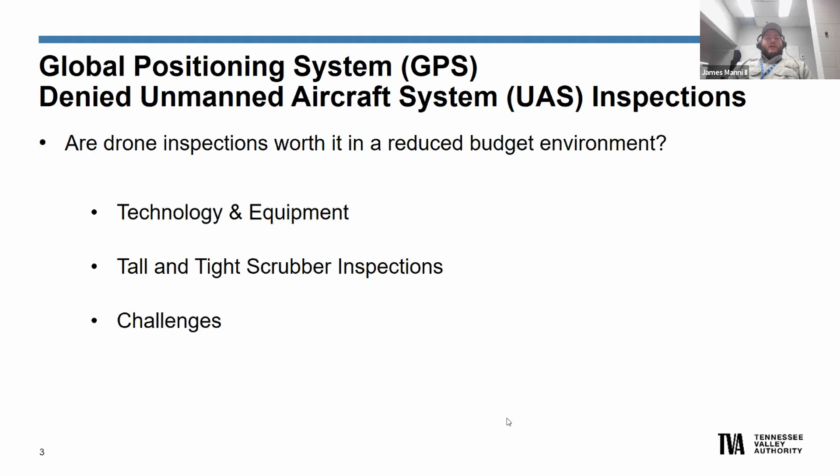So thank you for the kind words, the introduction. My name is James MannII, I'm program manager here with TVA. We're going to be discussing GPS denied UAS inspections inside scrubbers today. So the problem that we are going to be cognizant of throughout this presentation: are drone inspections worth it in a reduced budget environment? We're going to be walking through the different technology and equipment we use here at TVA. Matt is going to highlight the scrubber units themselves, and then we're going to discuss some challenges and considerations for operating aircraft in this type of environment, and ultimately we'll answer that top question there at the end of the presentation.

So the GPS denied aircraft we use here at TVA, a couple of different products, and we can't formally endorse anybody, so we've got them all here on the screen. We use two products from a Swiss company called Flyability, the Elios 1, which is in the top left corner, Elios 2, and then the Interactive Aerial Legacy 1. Each aircraft has their own unique characteristics, and they're all collision tolerant. The Elios 1 uses a free-floating carbon fiber cage. Elios 2 has a fixed carbon fiber cage, and then the Legacy 1 uses a LiDAR anti-collision system.

We do require here at TVA a FAA, Federal Aviation Administration, Part 107 license to operate any aircraft, indoor or out, and all indoor aircraft operations are performed by aviation services staff. That's their dedicated full-time job. And as we'll walk through the presentation, we'll talk about some of the challenges and why we've got the system set up that way.

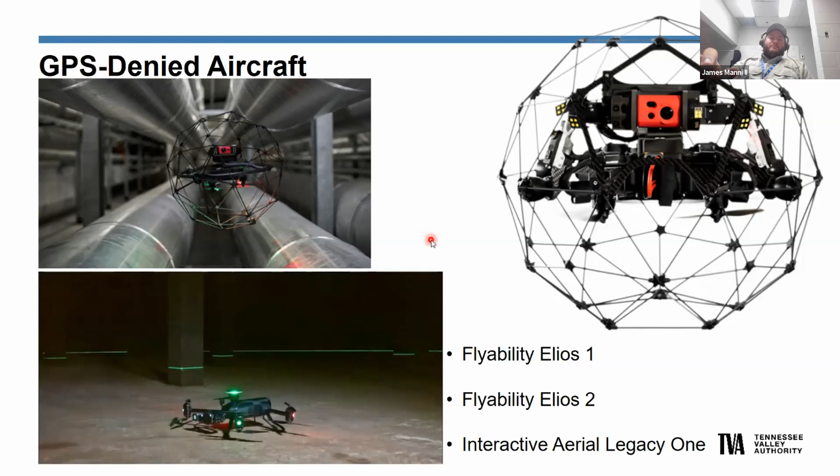So our workhorse for indoor GPS denied inspections is the Elios 2 for a couple of reasons. Its stability in a GPS denied environment is very strong. So without the satellite system providing stability, we have barometric as well as gyroscopic stabilization. And then the Elios 2 also has stereo, visual, and IR camera stabilization.

In tight environments, the video quality is good enough to do the inspections. It has a 12 megapixel main camera and records in 4K and 1080p video. We found over the last couple of years that we do most of our recording in 1080p due to file size constraints, and the quality that comes back, both on the video recorded to the aircraft itself and the backup recordings that go to the ground control station, is really high. Our engineers and the different stakeholders we work with inside TVA are very pleased.

The aircraft does carry its own onboard lighting system. It's very effective for minimal lighting or completely dark asset inspection. And then we have about an 8-minute flight time across the board with all three products, the Elios 1, the Elios 2, and the Legacy one has a little bit more. That might not sound like a lot of flight time, but in the indoor environment, there aren't that many places to go. So we've really been able to adapt that 8-minute range to the type of inspections we need to do.

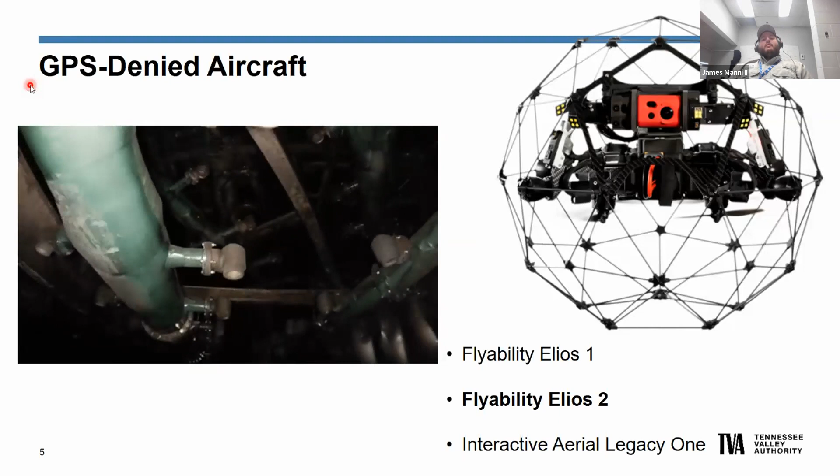So Matt, at this point, I'm going to... James, one more question. Yeah. This is Mitch. I'm sorry. Sure. Are there any temperature constraints on those drones? We've got a slide towards the end, Mitch, that details environmental concerns. So we'll address that towards the end.

Sounds great. But at this point, Matt, if you want to take us into the wet and dry scrubber piece, I'll drive the PowerPoint here for you. Sure thing. Thanks. Matt Wilson, TVA Engineering. So the video was from a wet scrubber. We're going to go through a wet scrubber first, even though this is DSUA webinar. We've had the most experience now in 2 of our large wet scrubbers, and it's highly beneficial. So I'm one of the stakeholders. I work with a lot of peers at the plants and in field services engineering. And let's go through wet scrubber.

So first, the idea came up in spring of 2020. Aviation Services was asked, can you get in these scrubbers? And I think the answer was, well, let's try. So we tried. Inspection of main header piping was the primary objective. We've got reinforced fiberglass piping, so it's prone to erosion, as well as we've got a lot of nozzles that tend to plug. Camera stability and camera quality and aircraft stability was questioned since this is a large vessel.

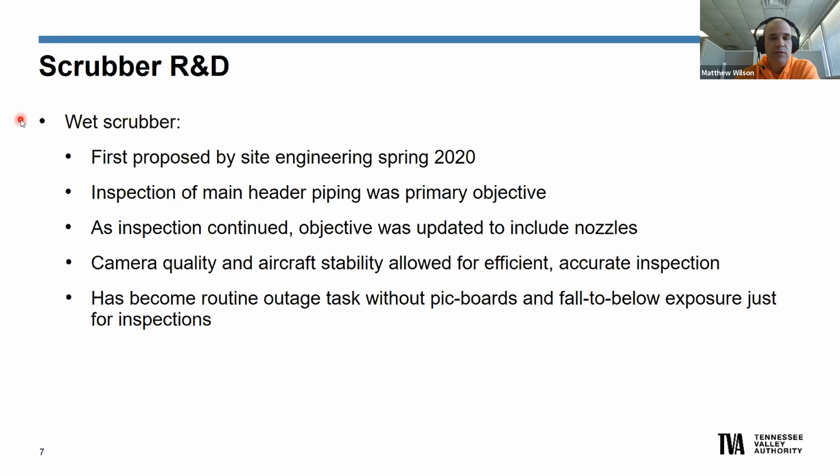So once we got in there, though, we found that this could become a routine pre-outage task to help define scope for the upcoming outages, and we can do it all without putting in pick boards above 80 and 100 foot falls to below. Next slide, please.

All right, so our case example is a 1300 megawatt unit at one of our plants. So it's got 3 absorber modules, high volume of flue gas flow, of course. It's a CE design, mid-90s. The absorber tank itself, 66 feet diameter. It's about 60 feet tall or so, 50 feet tall. And then we've got the spray tower diameter. And that's what the picture is on the right. It's looking up into the spray tower. It's about 60 feet diameter, and it's somewhere around 85 feet tall.

You can see we got a large section of stainless steel wallpaper on the side, and then you get into this complex design looking up through multiple spray headers that are counter-current to gas flow. And every spray header is offset by several degrees to try to offset interaction between the spray cones, get good even distribution. Next slide, please.

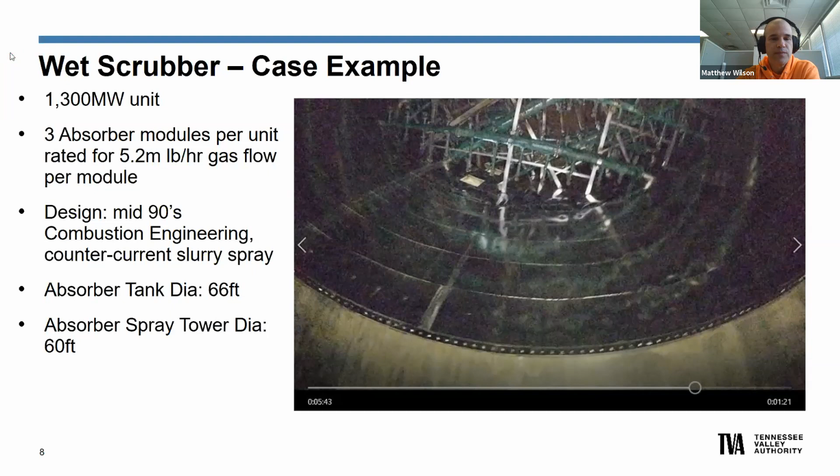All right, so like I said, they are fiberglass reinforced plastic. We've got 164 nozzles per level, 5 levels worth per module. That's 820 nozzles. We've got 3 modules, so it's nearly 2,500 total nozzles. Now, the picture on the right is an obvious pluggage. Previous to drone inspection for pre-outage, what we got to do is open up the doors, and engineers, maintenance, they look across while the spray headers are spraying. That works really well for everything close to the doors.

We only have doors on one side of the vessel, though, so it gets extremely difficult to discern what's plugged up on the opposite side of the module. Well, with this technology, you just fly the drones over there. Even the video footage, even though it did not have anything as dramatic as the picture on the right shown, it showed at least 3 plugged nozzles that were flush with the end of the nozzle. Well, all those take away from SO2 performance of this scrubber, as you're aware.

And from the lower header to the floor of that tank, it's an 82-foot drop. So imagine getting out there across 82 feet. Even if we say pick boards, well, guess what? Somebody's got to put the pick boards out there, right? Make it safe for the inspectors. That's usually the carpenters. So we're talking about carpenter safety as well. All right, next slide, please.

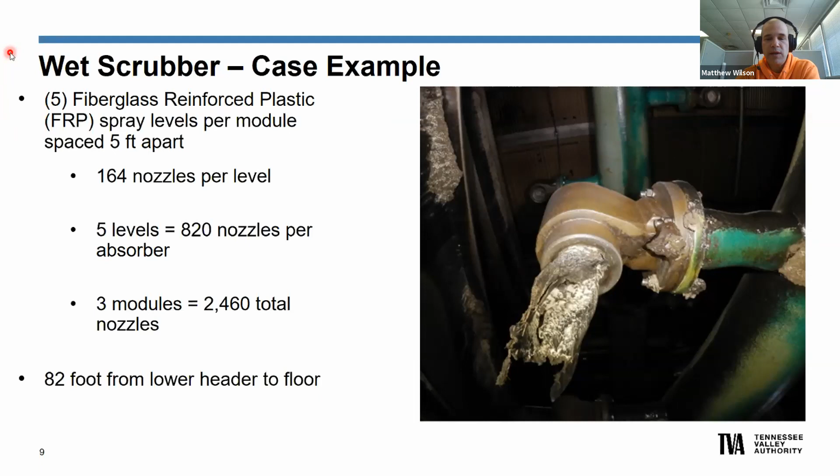All right, so additional inspections, we can do spray header erosion. That's what I've got circled on the right here. So we can look up into the nozzles. We can also do a look down at the top of the spray headers, which receive the brunt of the spray slurry from the spray level above.

So I've got circled an erosion area, and that's definitely scope that needs to be repaired on the next outage before that wears all the way through, breaks that nozzle and branch line off, and then we've got liquid slurry either spraying straight up, or if it breaks completely off, spraying straight out instead of counter-current to gas flow. We can also look at all the hanger systems while we're in there easily.

The rubber and stainless steel liners, the gas entry ring hood without an immense scaffolding cost. And I tell you, it is an immense scaffolding cost to look at the bottom and the top of where our flue gas entry comes in. Our flue gas entry comes into each module from a 48-foot wide by 29-foot tall duct.

That is a large duct, and it is difficult to discern things on the top of that duct. So even going backwards in this scrubber application, this drone can easily get up to the top of that duct and see if we see any daylight, holes, major corrosion, water in-leakage, etc. Next slide, please.

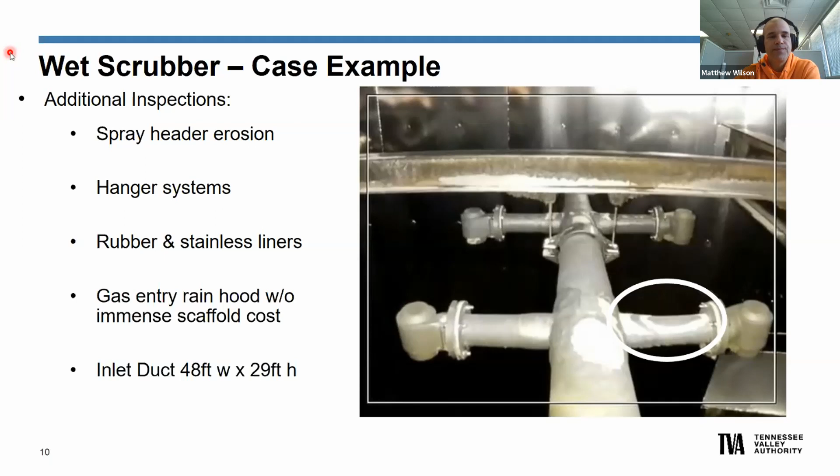So, you know, how much money do we need? That's always the question for a scrubber. Well, actually the question is, here's how much money you have, and then how much money do we need? And then argument ensues from there, or a technical discussion. So it really helps persuade folk if you have data: here's how much erosion we have. It's not an assumption. This is what we got, and this is video footage.

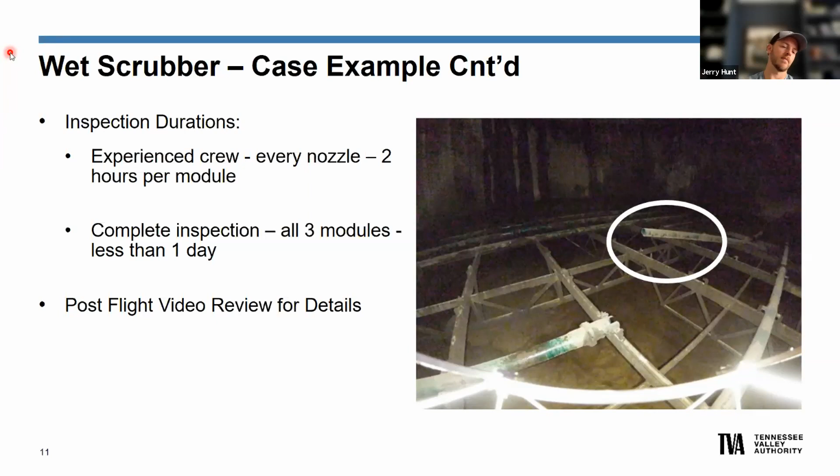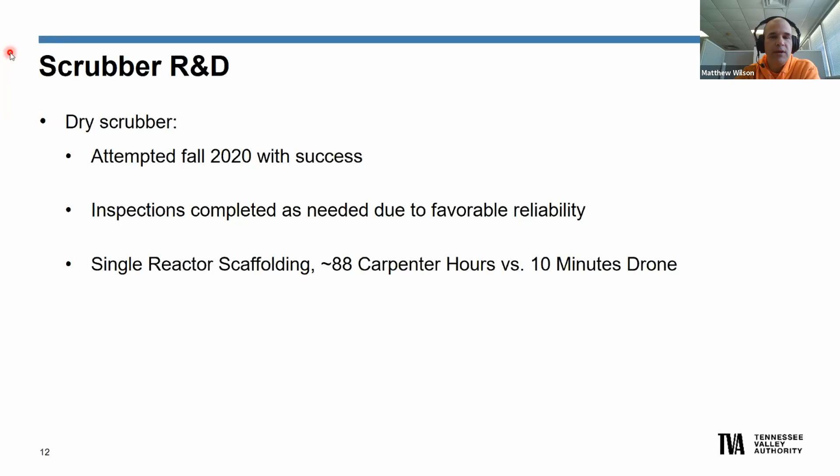It was just a construction shadow line. So we expended about 88 carpenter hours on that versus an easy 10-minute, or 8-minute flight time of drone would have been able to clarify that without any issue. And we could have saved all those carpenter hours. So we're still learning where we can apply this and trying to remember when to apply it across our whole fleet, right? Because we're a lot more than one plant.

All right, so that's looking up our 90-foot duct. Next slide, please.

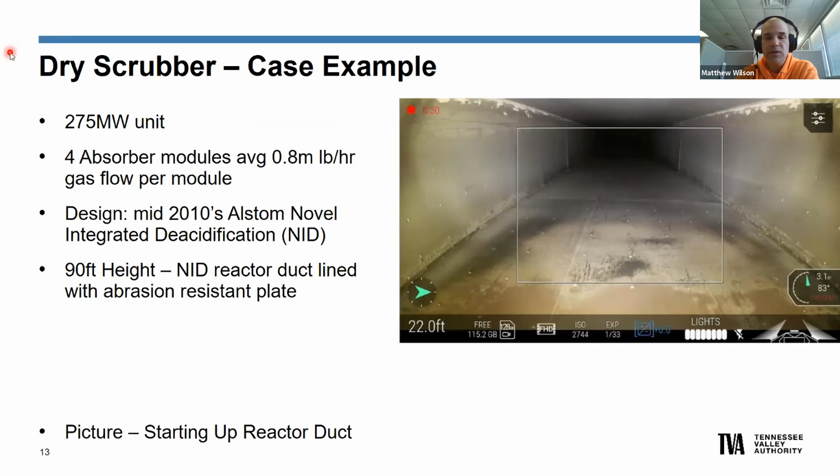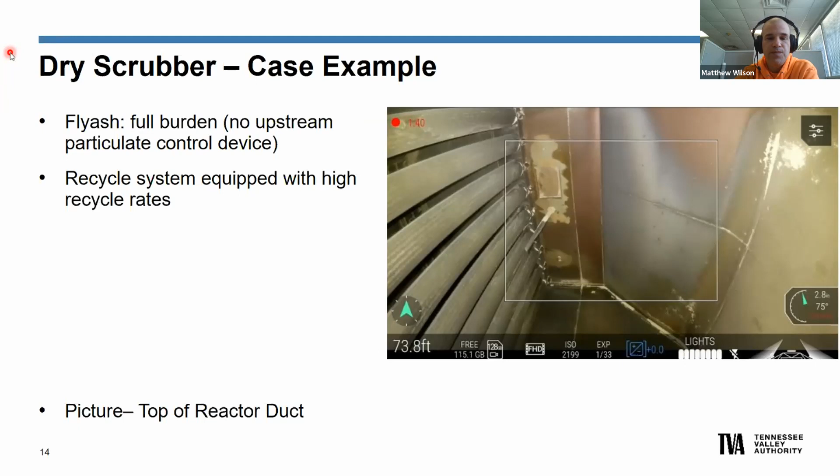We also want to proactively look at these items, and the drones enable us to do that before we are reacting to maldistribution or performance issues. We want to catch it early. If you catch anything early, then it costs less money to fix it, right?

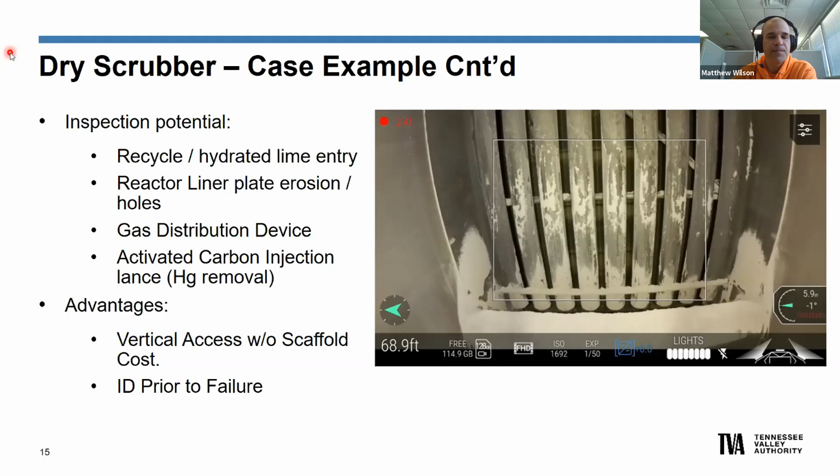And I'll turn it back over to Jim. Thanks, Matt. So there was a question about this earlier.

The challenges and considerations for the environmental conditions are at the front of our mind as operators constantly. We touched on earlier reviewing the blueprints and schematics to make sure we have enough space to operate around.

We also try to look for areas that could reach out and hook on to the cage, because that also presents a problem. Dust and debris, especially in the dry scrubber, is a constant concern depending on when we're able to do the inspection during an outage. Visibility could be very limited, which makes the inspection difficult.

If the operator can't see where they're really looking, then the video that the engineers review later is going to be adversely affected by that.

On our large scrubber modules, drafts were a concern that we had not considered until we showed up the first time to do an inspection. There's a very strong draft coming in through this door, and our aircraft are not able to fly back out through this door because of the draft.

So what we've learned to do is we come to the side, either the left or right side, and then the visual observer will reach in and grab that drone.

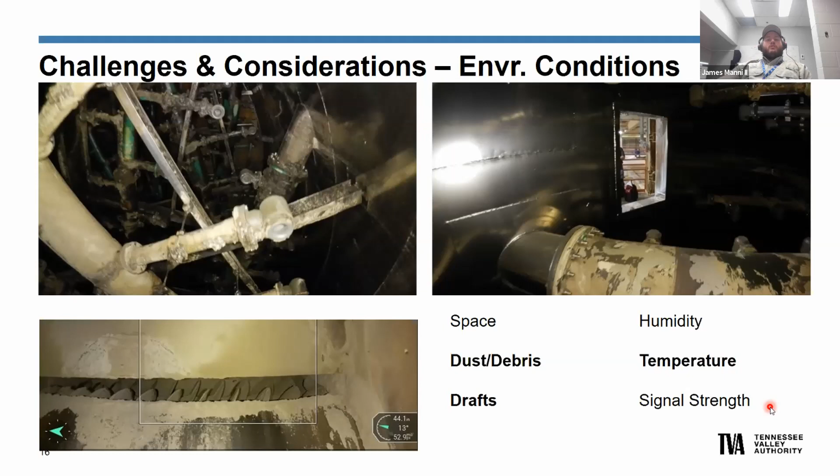Sure. So our overall question that we asked beforehand: are drone inspections worth it in a reduced budget environment? I think for us, it's a resounding yes.

From the inspection side, not being an engineer, I see tremendous value from a safety perspective. We're limiting inspection hours from building scaffolding in confined spaces at hazardous heights, and it allows the different stakeholders to formulate a real empirical plan based off of repeatably captured visual data.

We start to build a record over time, and that's just a tremendously valuable trait to have when it comes to managing, maintaining these assets.

Matt, do you have anything to add?

I wanted to add, being with you a couple weeks ago, the high dust environment, which we tried to inspect a precipitator inlet duct for normally some vertical and slope duct that's typically inaccessible to us. We didn't have complete success though, due to so dusty. So I guess the analogy I was witnessing, even though I was not flying that drone like you were, James, is you alluded to it: when it gets too dusty, you're around a corner, you can't physically see your drone, and you lose video footage, and you're just dead in the air.

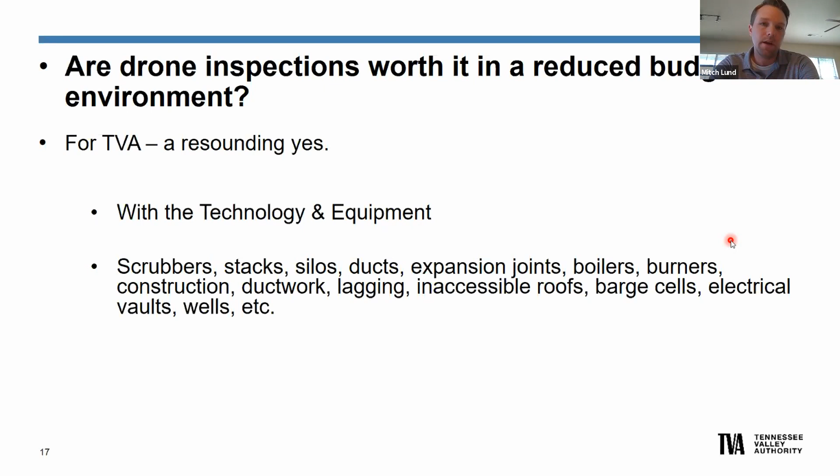All right, so byproduct is slightly moist, as we're all aware. But if it gets really moist, then we have a major problem. So this is a case example. It's actually an abandoned fly ash silo on one of our sites. James and group was able to do an external structural inspection, and then we were able to pop into the inside. It's 35 feet diameter, 65 feet tall, 1970s design.

Side note, our structural department for all stacks, all silos, coal silos, coal bunkers, is getting stronger and stronger, more and more strict. The drone really complements structural inspections. And talk about scaffolding. I mean, you can't go up this stuff.

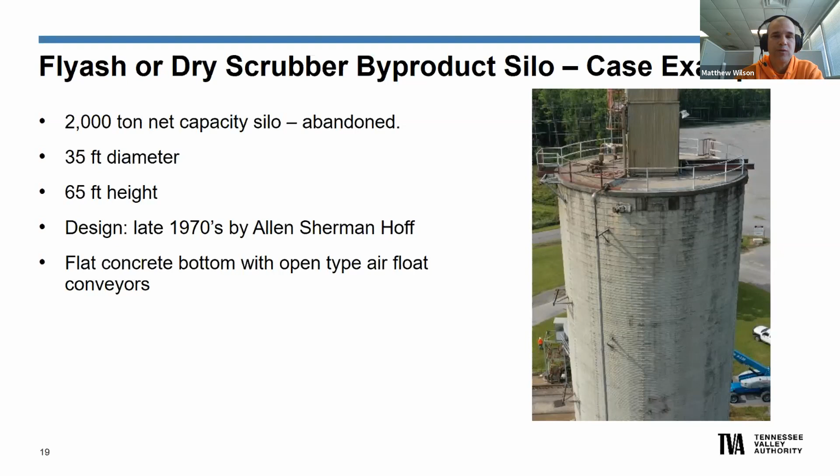You can't build scaffolding high enough to inspect our 1,000-foot stacks, right? Next slide, please. So we put the drone down in the top of an empty dry fly ash silo. So inspection potential for fly ash or byproduct silo: number one, I was thinking we got water entry, fly ash level drawdown, and instrument inspections. So in this case, we're looking down. So yeah, this thing's empty. You can fly the drone all the way down to the bottom. Next slide, please.

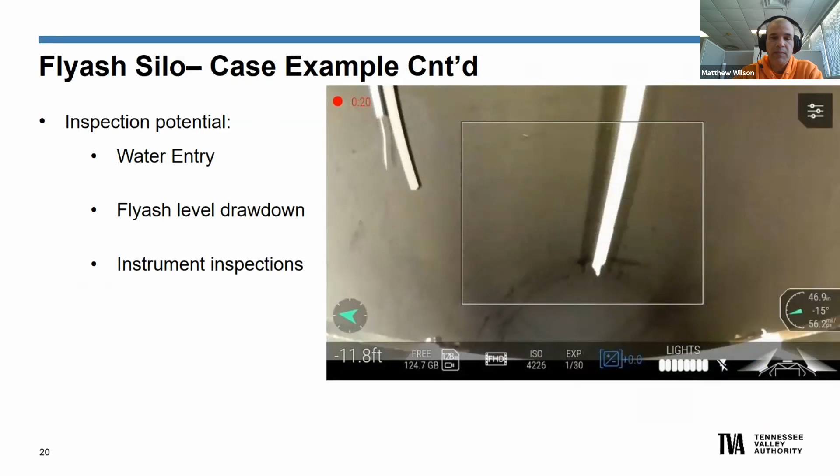And it's interesting, we came in from the top. So you see down in the lower left-hand corner of our picture, we've got negative 11.8 feet. So it's at the 0 level for the start time at the roof, right? We went in through that roof hatch. So we got some major scaffolding savings. You can complete your roof inspections without any drawdown.

How do you do your internal roof inspections now? Well, you got to get inside. You got to get a high power flashlight. You got to look 65, 80 feet up in the air and try to look for a wet water entry zone. And that means somebody's got to go in. So isn't it always a precarious situation when somebody's got to open that lower door that's down at the bottom of potentially a 65-foot head?

And at TVA, we have struggled through plugged fly ash silos, not byproduct silos yet. That water got in here in major proportions, and we had some extreme buildup. So when is it safe to open the lower access door? This 8-minute flight time quickly complements. You stick the drone in, you can see if it's safe to open that bottom hatch. You don't even need the level out. You can drop it in, look up, get close to the roof.

Even though this was a dirty inspection, and later on in this video it kicked up a good amount of dust, aviation services was still able to get good flight time, look for water entry, etc., especially at the penetration points. You see in the lower right-hand corner of the captured screen the bottom of bags from our little bag house that's on top of the silo. So you can see the condition of the screen that's on there that we actually have to walk on to change those bags out. Always, again, a precarious situation. All right, I think that's it, Mitch.

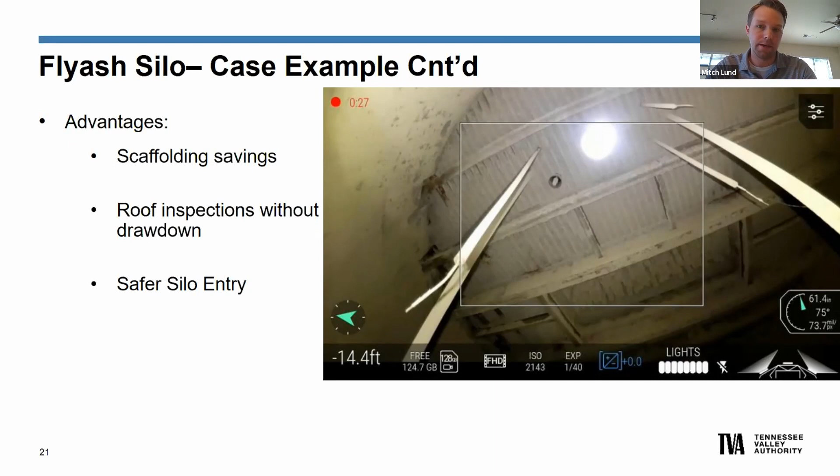Well, that's great stuff. I like to keep stuff on time, but when you're talking about cool stuff, we're going to ask you to stay longer. So I really appreciate both you guys sharing this story. I think it can apply to a lot of our group members and attendees. So thank you very much for putting this together, Matt and James. And I think now is about the time when we stop for a commercial break, Jerry. So maybe I'll transition it over to you, okay? I appreciate that, Mitch. So let me share my screen. Hopefully you guys can all see it.

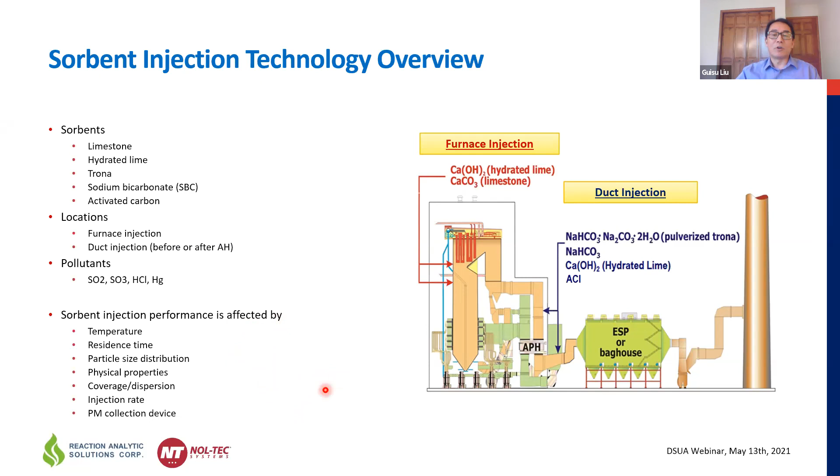Now, let's get into the basics of the sorbent reaction process. So when we inject sorbent into a hot flue gas, the sorbent can go through thermal decomposition. For example, if you inject limestone, you're going to have some calcination happening, same as with hydrated lime. And sodium-based sorbent, once you inject it into a hot flue gas, also goes through thermal decomposition. Now, at the end of the thermal decomposition you're going to have fresh calcium oxide or sodium carbonate for further reaction. But also you're going to have some particle physical properties that are changed.

For example, the porosity and the surface area. So all those will be changed. Now, after the decomposition, it's followed by what's called a sintering characteristic. So essentially some of the particles will become a type of melting phase. You actually are going to reduce the porosity and the surface area if you inject at too high temperatures. So those things also matter when we consider the injection temperature, specifically how that's going to affect the performance.

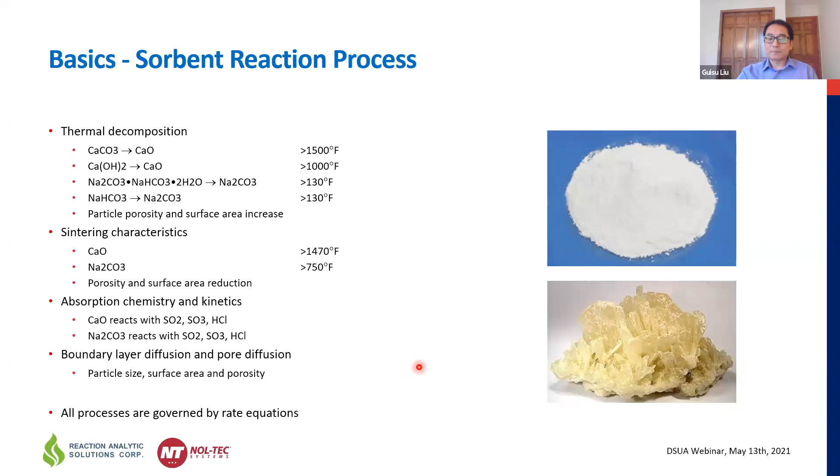For us to develop a model, we have to combine chemical reactions and incorporate the diffusion for the boundary layer and also inside the particle, and let the model decide the ultimate reaction regime at certain operating conditions. So we develop a model, we incorporate all these processes in our model, and we have inputs using the sorbent properties, like surface area, porosity, the size distribution, and most importantly, the flue gas operating conditions like flow rate, temperature, species concentration. All those things will ultimately affect the performance because this is all chemical reaction related.

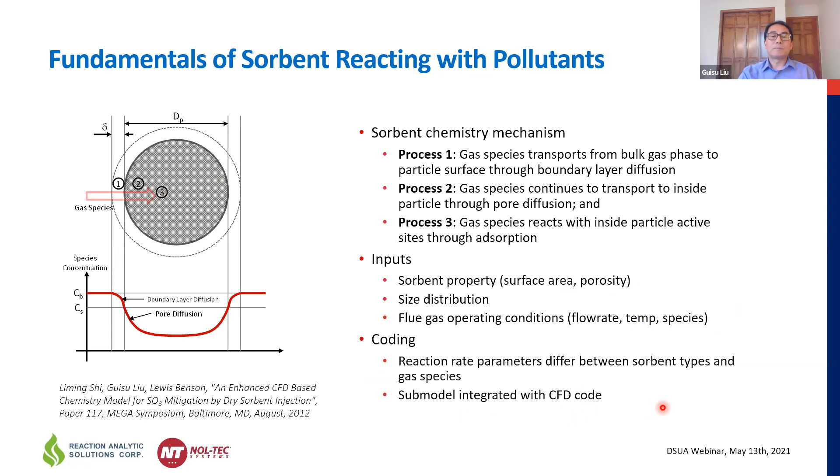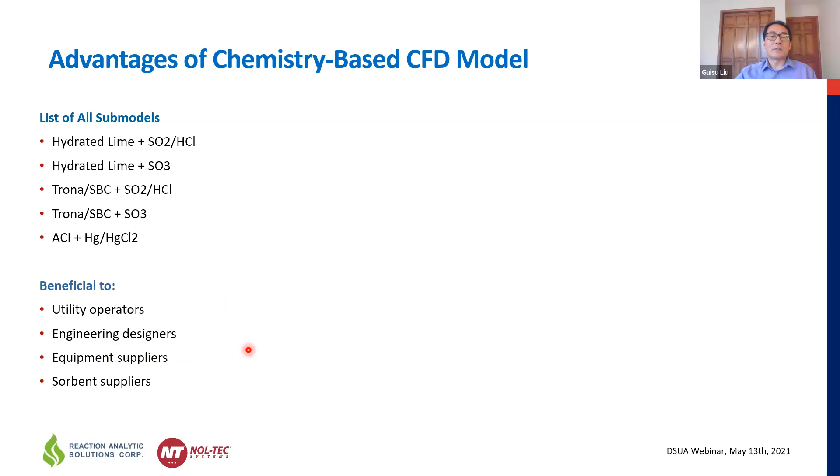So we incorporate all these mechanisms into a code, and we couple that code with CFD so that it becomes a more powerful tool for making predictions. So over the years, we have expanded our capabilities to include almost all kinds of sorbent-related reaction mechanisms. So hydrated lime reacting with SO2, HCl, and SO3, same as sodium-based sorbents. We also recently expanded our capability to include activated carbon reacting with mercury species. So all these mechanisms have been developed. And as you can probably already feel, with that tool we can help the utility operators, the engineering designers and the equipment suppliers optimize the system and get better efficiency.

But with the chemistry-based CFD model, you can do a lot more, because the chemical reactions give you the fundamental reactions and how they relate to the species and all those pollutants that you care about. And with that capability, you can evaluate a number of different operating parameters, and even the sorbent properties, because the sorbent size, porosity, all those properties are inputs to our model. So in the next case studies, we're going to talk in a little detail about how each of these models will help us optimize our solutions in a detailed way.

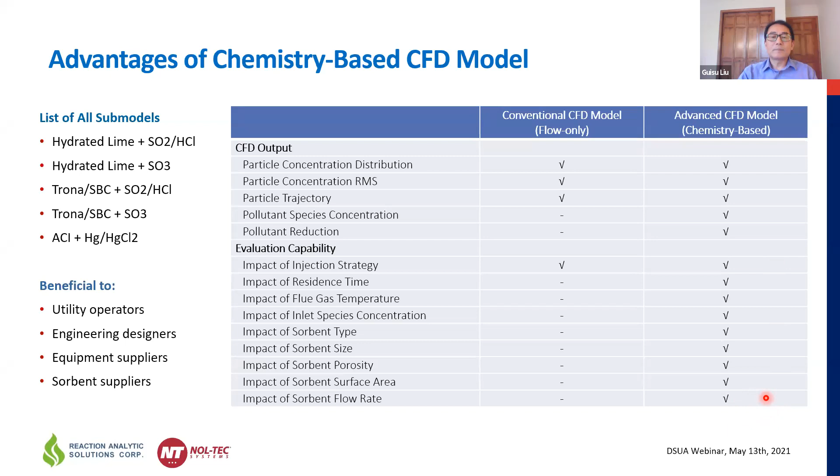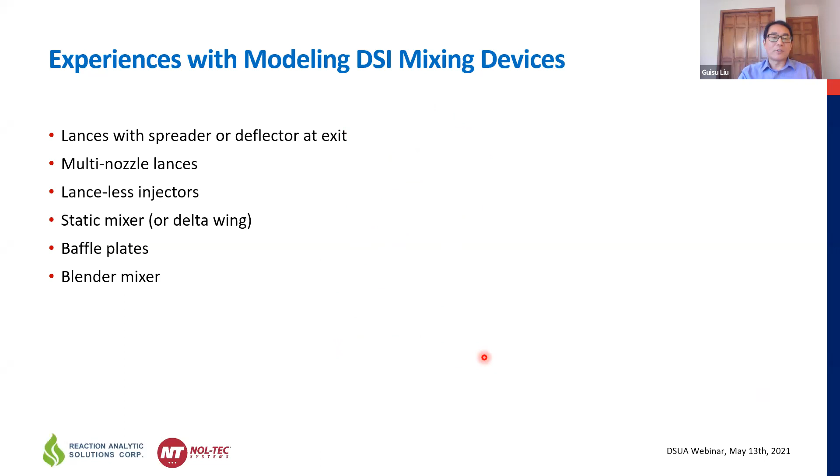So with that tool, over the last 5 to 8 years, we've actually helped a number of engineering companies and utility owners look at different ways to enhance mixing and particle dispersion. This shows a number of ways to consider enhancing your mixing, and we have to look at many types of mixing devices. So just some experience to share with you about the applications of our models.

This trial project was sponsored by EPRI, and we tried two different sorbents: one is hydrated lime, and the second is trona.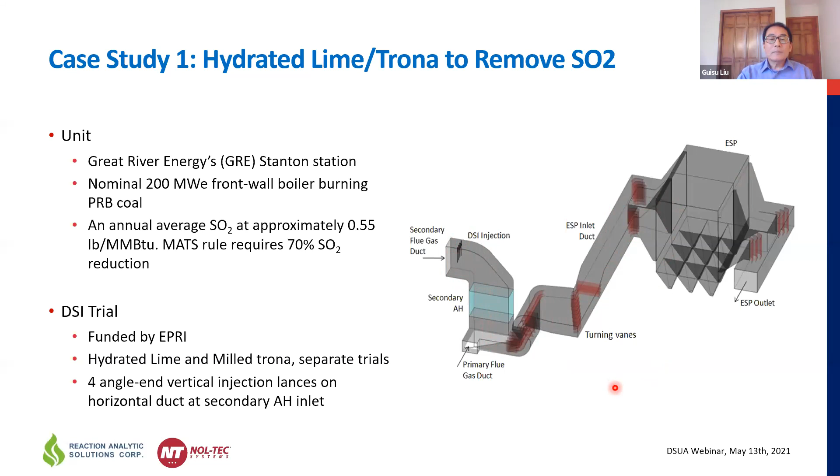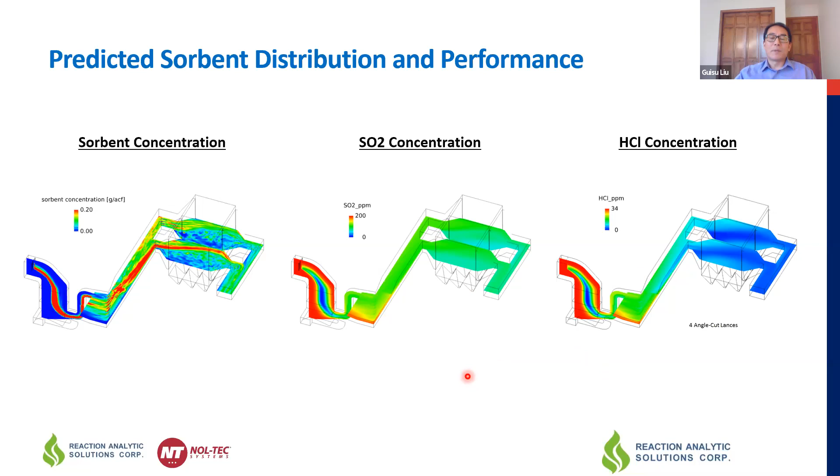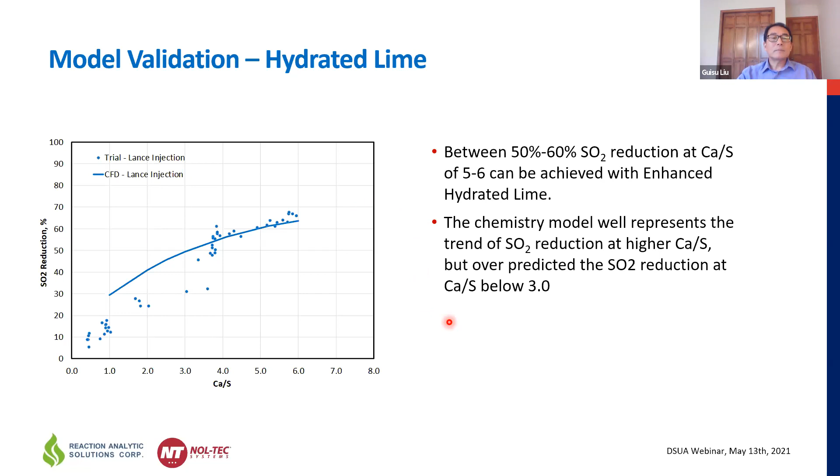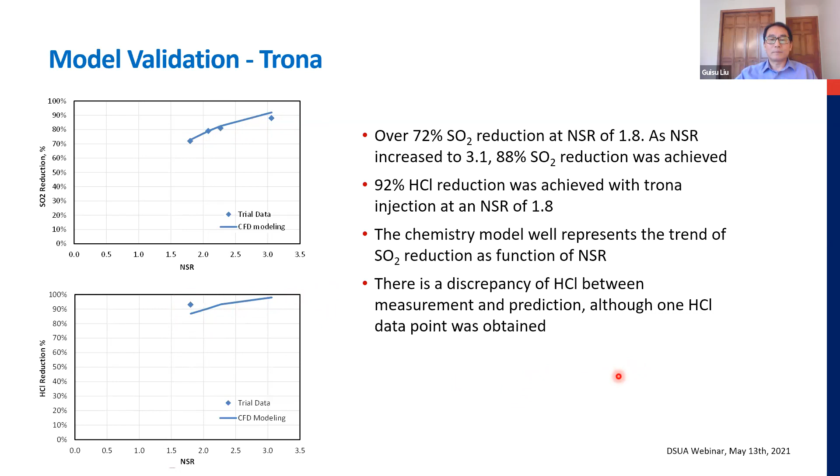Now, the second case study is about injecting hydrated lime to remove SO3. I know that SO3 removal is a big part of dry sorbent injection activity in the United States. With this tool, we can actually help optimize the injection quite well. This case study is for a 450 megawatt coal-fired plant equipped with SCR.

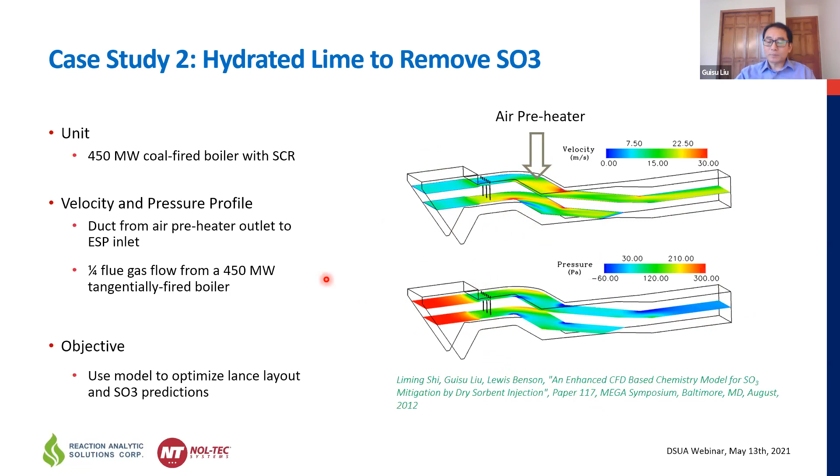First of all, we got some velocity distribution as our flow model, and this is a pressure distribution along this flue gas duct. Now the next thing we did was...

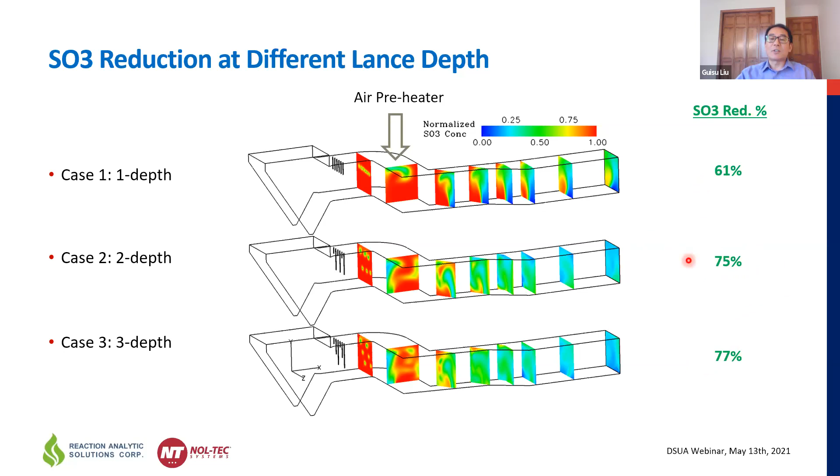But the prediction of the CFD gives you a very good indication on what the system can give you, and gives you a choice for making decisions.

Now I'm going to give case study number 3. This is a project we did for a waste-to-energy plant in the UK, burning a meat and bone meal type of fuel.

This boiler is 72 megawatt thermal, so it's really a small boiler, and a DSI has already been installed to inject sodium bicarbonate to remove both SO2 and HCl. The customer owners reached out to us trying to see if there is a way to help them reduce the sorbent usage.

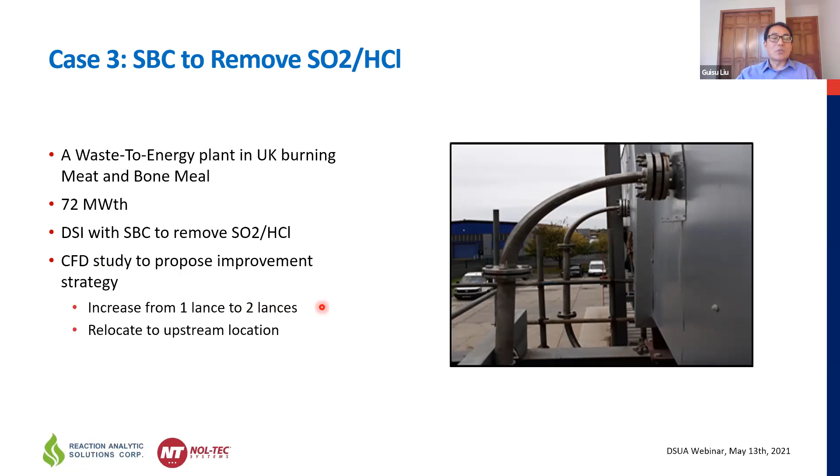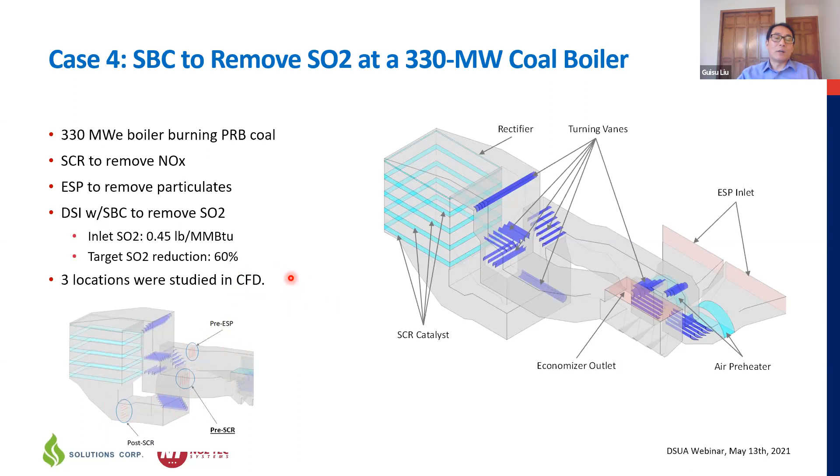I'm going to give some results of the CFD simulations. This is the summary for the pre-ESP injections.

This is the particle trajectory. You can see the particle injected from the lance, and you end up having about 2.5 seconds of residence time before the particle gets into the ESP.

Now this is a particle concentration distribution. Between these together, you can have a sense of your injection system, whether that's giving you the best particle dispersion or not. This is the ultimate SO2 concentration prediction.

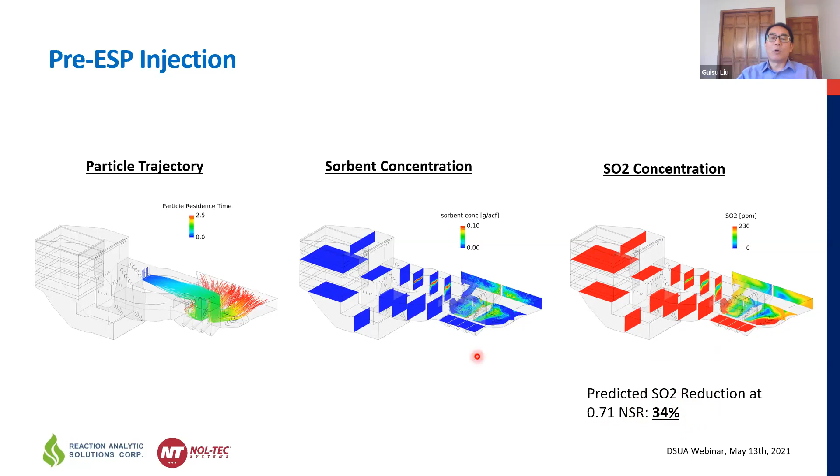That's where the SO2 has been reduced, and ultimately at the calcium-to-NSR of 0.71, we predict about 34% of SO2 removal for these injection locations.

Now let's move to the post-SCR injection. This is at the bottom of the SCR. So the particle has a longer residence time, about 4.5 seconds. And the particle distribution, you can see that after the injection, it gives a very good particle distribution in the duct before the ESP.

And the SO2 concentration also gives you a better understanding of how the residence time and the dispersion can help you reach what is the SO2 reduction level you can get, which is predicted about 54%.

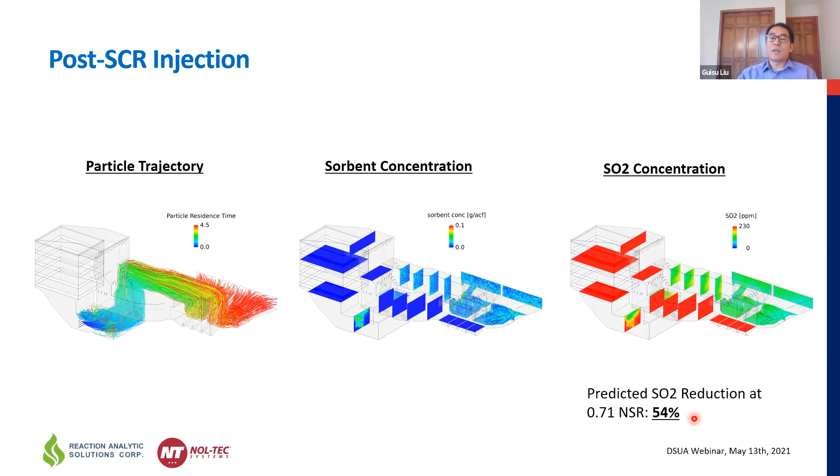Compared to pre-ESP injection locations, this is about 20% of SO2 reduction level improvement, so it's quite significant.

The next location is pre-SCR. It probably gives you the longest particle residence time possible, because it's almost like 15 seconds as it's going through the SCR.

And the particle dispersion is very good, even with a lance injection. Now this is the SO2 concentration as a consequence of the injection of the sorbent.

Overall, we are getting about 64% of the SO2 removal rate. Compared to the post-SCR, your residence time is more than double, or even probably triple, but the SO2 reduction we only gain is roughly about 10%.

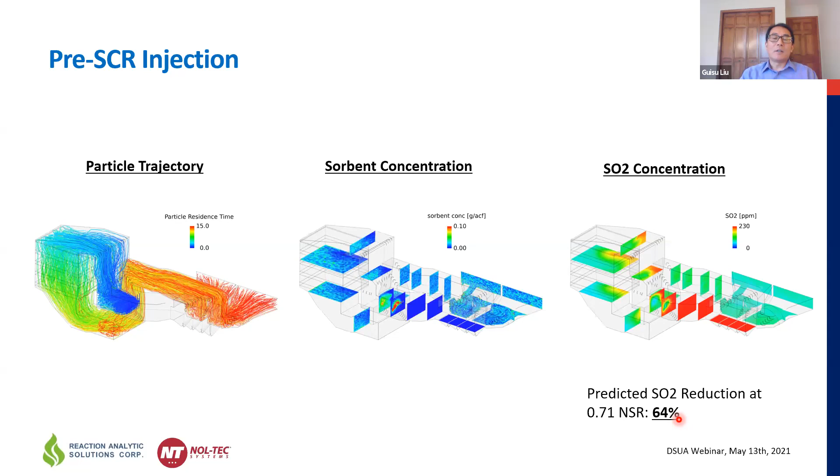So it's not a significant jump as your temperature and your residence time get longer, but certainly that helps us. The model will help us understand what magnitude of improvement you can get by the different locations and how time impacts it.

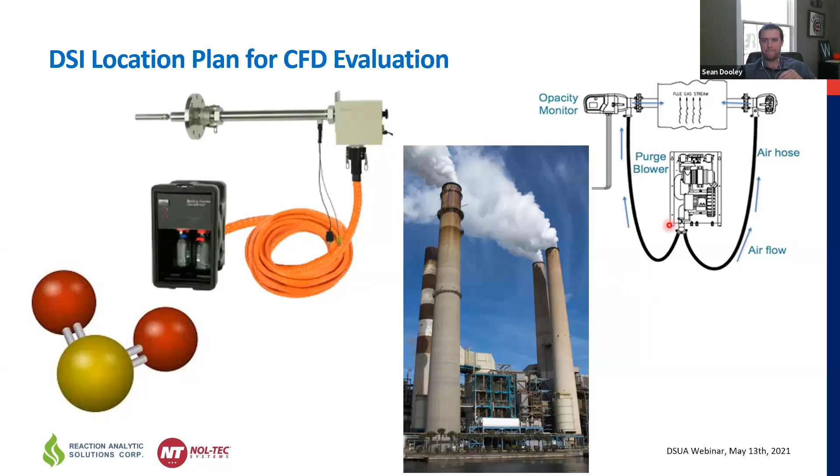This is another stock photo, but generation was really important. Hitting their 100% capacity rate was a goal.

This plant had not run really anywhere above 80% for about 3 years. They were mostly restricted by opacity issues that kept them below that threshold. It seemed like when they got above 80%, they had some major opacity spikes.

Guisu showed the model of the ESP. It's a relatively undersized electrostatic precipitator for this plant, especially at the higher megawatt loads. So that was a big consideration, being mindful that we weren't going to exceed the opacity, but trying to see how far we could get, or how close we could get to 100% capacity.

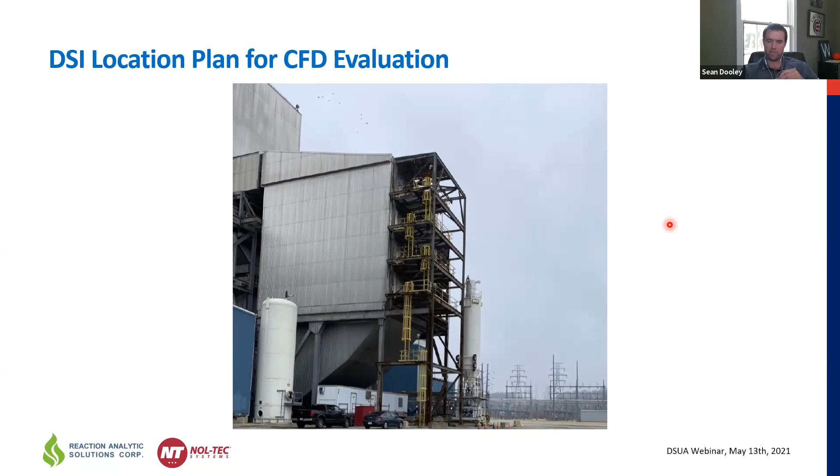And if you see in the center of that photo, this is a real photo, is our silo turned up with its wheels in the air, and our control trailer to the left of that. You go to the next photo, Guisu.

So these were actually the physical injection locations we were looking at. This is the pre-SCR location. I actually didn't take a photo of the pre-ESP location because we found out pretty quickly through Guisu's model that it was just not going to be feasible to get the removal efficiencies we wanted. So we really narrowed it down to these two locations, the pre-SCR and the post-SCR. So here's just a location where we were considering doing the trial. You can go to the next one, Guisu.

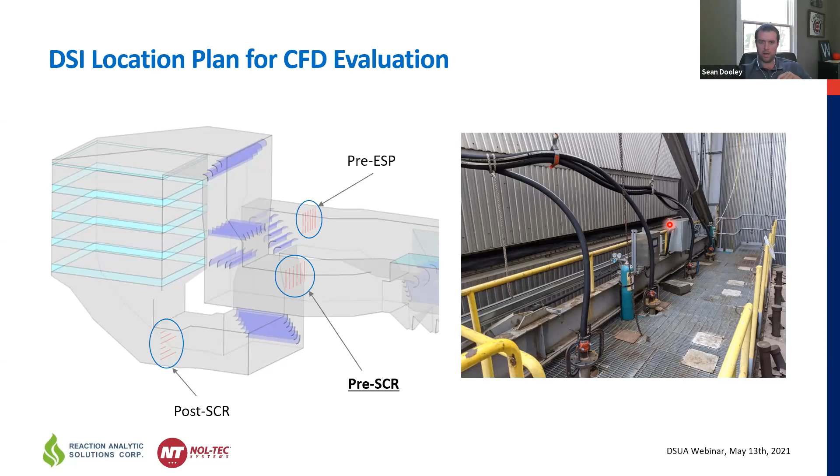This is the photo of the post-SCR location. This is where we actually did a lot of our injection throughout the trial. We were downstream of the SCR. There were some concerns about injecting upstream of the SCR, and through Guisu's model, we were able to determine that the benefit of injecting pre-SCR was minimal compared to the post-SCR. So we decided to take all risk out during the actual trial and just focus on the post-SCR location. You can go to the next slide.

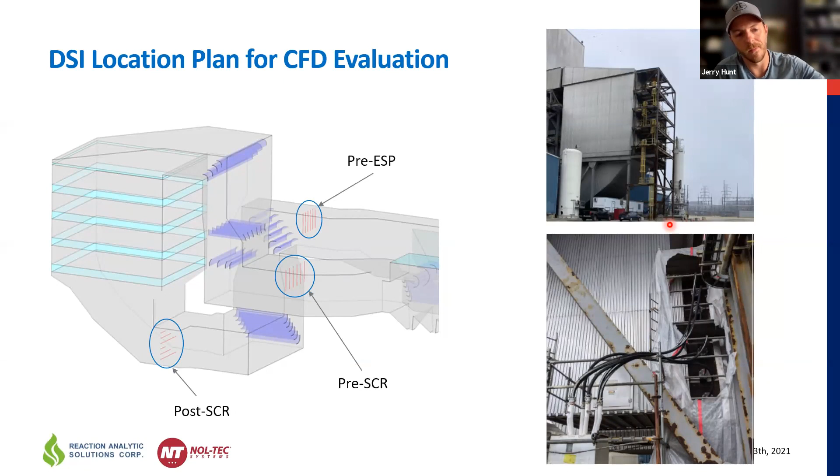So you go to the next slide, Guisu. This is really the only slide that matters. This is the actual comparison of the CFD model and the actual field trial. During the field trial, we actually noticed the resistivity of the flue gas decreased because we were adding sodium bicarb. So the efficiency of the precip actually went up during the trial, which we kind of expected, but we just didn't know how much. So that actually allowed us to increase the capacity past 80%. I think we hit about 100% of their capacity for that unit for the first time in probably 4 or 5 years without any opacity issues.

So you'll see the blue line there is the CFD predicted removal efficiency. And then the red line was the actual trial data. I mean, it was about as textbook as it could be. I like to say that's how they all are, and they're getting there. These models are just getting better every time we use them. Also, the efficiency for us to focus on just that post-SCR location was huge. It saved the customer a lot of money in terms of time and us doing some guesswork on site. So it was an excellent tool for us, and we were able to even take it beyond what we had expected because of some other benefits of the sodium bicarb on the conditioning for the precip.

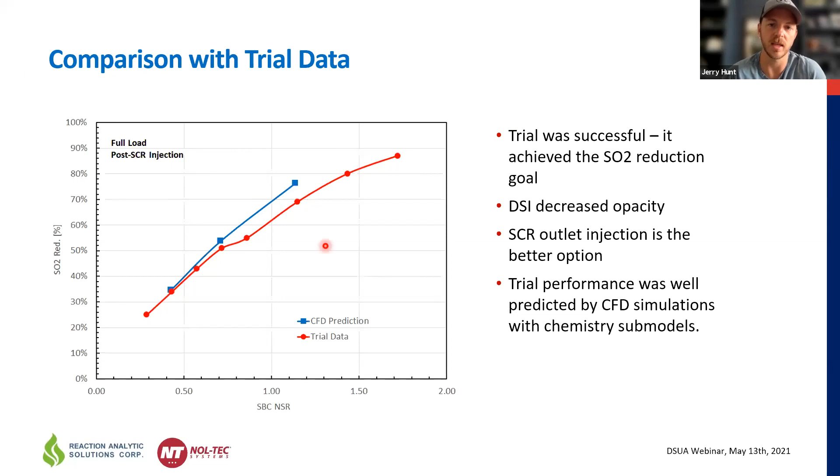But there was a question about your case study too, the SO3 with hydrated lime. On the example of the 6 versus the 8 lances, Guisu, did you guys take a look at the comparison of percent removal at different residence times downstream of the injection point? So like 1 second versus 2 seconds, et cetera.

So for this case study, we didn't look at the different injection locations and of course the different residence time and the impact. But certainly the model has the capability to do that, as you can see from the other case studies. But it will be interesting to see how the model can really answer that specific question. But for this case study, we didn't look into that. But with the model, you could certainly take the cut from, say, 1 second, 1.5 seconds, and compare these different.

Yes, that's right. So in our typical results, we have many curves, like you have seen the performance versus calcium by sulfur ratio, those curves, which are very typical for further analysis. But we also have a curve of the performance versus the residence time. So as a result from the CFD modeling, with that curve, you can do that kind of analysis, to look at different time and what the performance would look like.

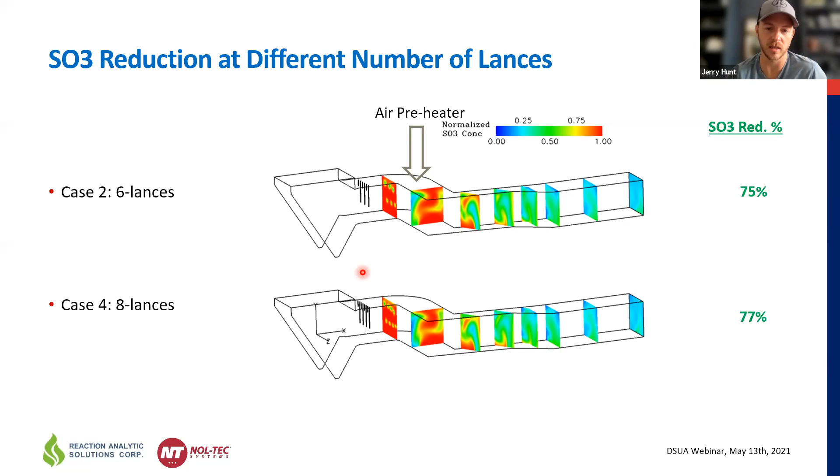So, Guisu, on that note, when you guys go to case 3, when you looked at 2 lances versus also going further upstream, in that case, did you or could you, with the CFD modeling, be able to assess if you get a bigger bang for your buck by going from 1 lance to 2 lances versus just going upstream with, say, 1 lance? We get the question a lot, if I go from 1 second residence time to 2, how much is that going to improve performance?

And I understand that dispersion and residence time, to a degree, go hand in hand. But did you guys look at that here, or can you speak to how to assess what's the right solution, or maybe both? What you did is exactly the right solution, but. Yeah, in this case study, we looked at both solutions, and we didn't do the cases where we actually look at each of the solutions and the consequences of these solutions. But the model certainly has that capability.

But back to this case again, the overall performance improvement is not very significant, because the existing performance is already good enough in terms of the sorbent injected and the overall reduction level they are getting. So we are only getting a marginal improvement here by these 2 solutions. So I guess both solutions probably each contribute a little bit. But the model certainly has the capability, if you are interested in looking at the contribution from the lances and the contribution from the time.